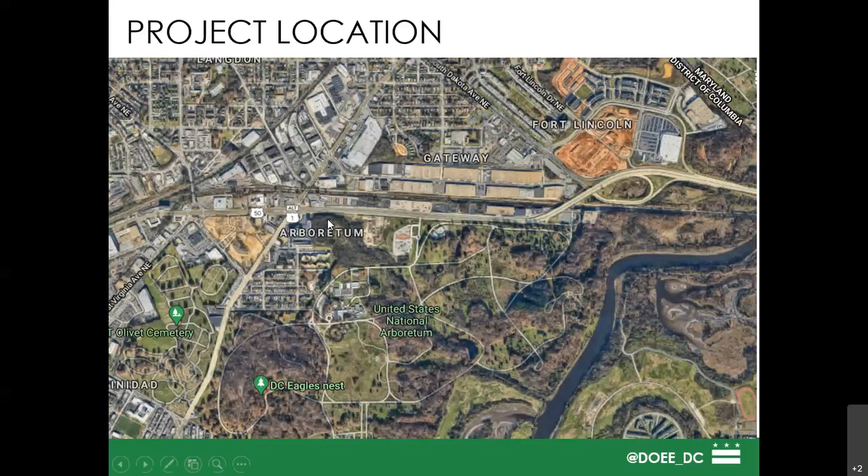So very briefly, our project location. When we say we're working at the Arboretum, we are working at the Arboretum. So we all know where that is, located off of Route 50. But if we drill down, the area in particular that we are working off of is along Hickey Lane Northeast, near where the R Street entrance is. There's a large parking lot that most people probably park at to go to the Arboretum Visitor Center, and that would be where we're focusing our efforts.

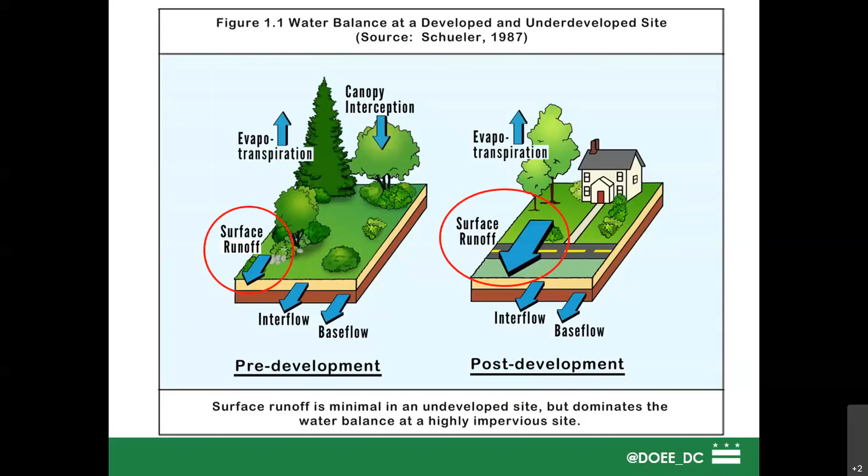So what? This is the so what factor. Why do we care? In the business, we like to say that the problem with stormwater is that it is hot, fast, and dirty. Hot, it contributes to thermal pollution when it's coming off of a hot parking lot. Anyone who's seen a parking lot in the summertime can actually see the heat coming off that parking lot. Well, when a rain event happens, stormwater will hit that parking lot and kick up all of that heat, and bring the heat with the stormwater into the streams and rivers. That thermal pollution is not good for our aquatic friends.

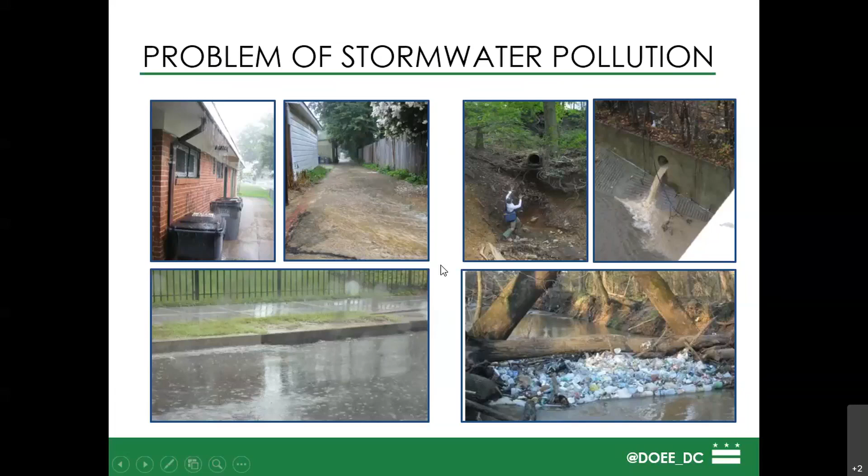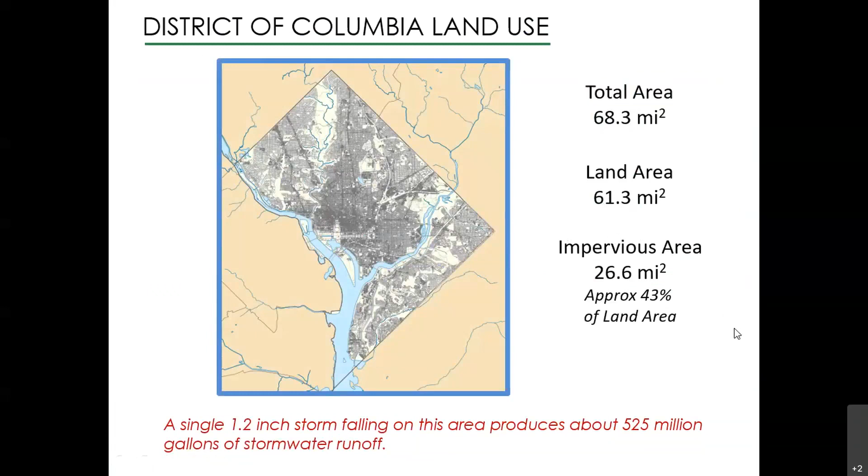So with that in mind, let's take a look at the land cover of the district. So in the district, we've got 68.3 square miles of area. Much of that is land, 61.3, where the rest is the streams and the rivers. And of that 61.3 square miles, approximately 43% is impervious cover. And what that means is a single 1.2-inch storm falling on this area will produce about 525 million gallons of stormwater runoff. And that's for one storm event.

We use the 1.2-inch storm as our metric because the majority of the storms in the district are 1.2 inches or less on an annual basis. So again, that's 525 million gallons for one storm event. So that's really the problem that we're trying to deal with.

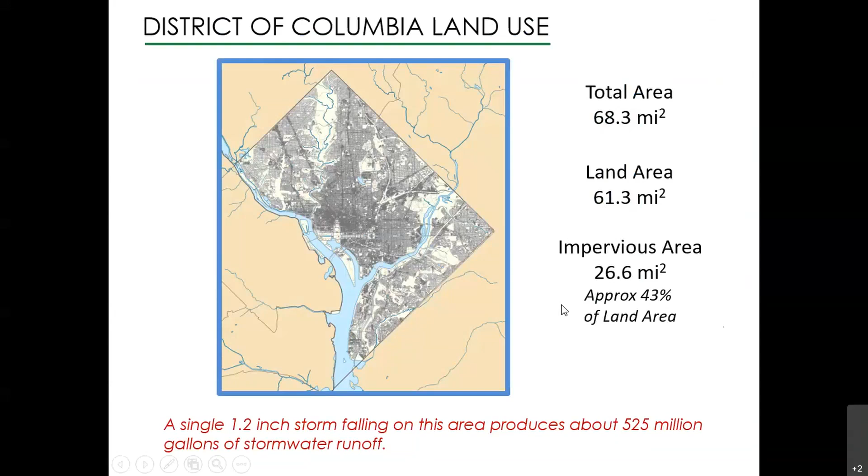The one thing that I like to do at this point is point out that there are actually two different sewer sheds within the district. The central part of the district is called the combined sewer shed, and that means that wastewater and stormwater are going to the same location. They're going to the wastewater treatment plant. That's where DC Water is focusing their efforts, and they're building large underground tunnels to capture the larger flow events. Because when there's a storm event, that water doesn't go to the wastewater treatment plant, but actually overflows with everything else into our streams and rivers.

However, the rest of the district, the other 2/3 of the district, is what we call an MS4 system, or a municipal separate storm sewer system. So there's 4 S's there. That's why it's called that. And that's where DOEE focuses our efforts, because that means the water that goes into the storm drain goes into a pipe and is delivered directly to our streams and rivers. There's no filtration. There's no wastewater treatment that's occurring. Anything that's hitting that storm drain is going straight into our rivers. And again, it's everything that it picks up along the way.

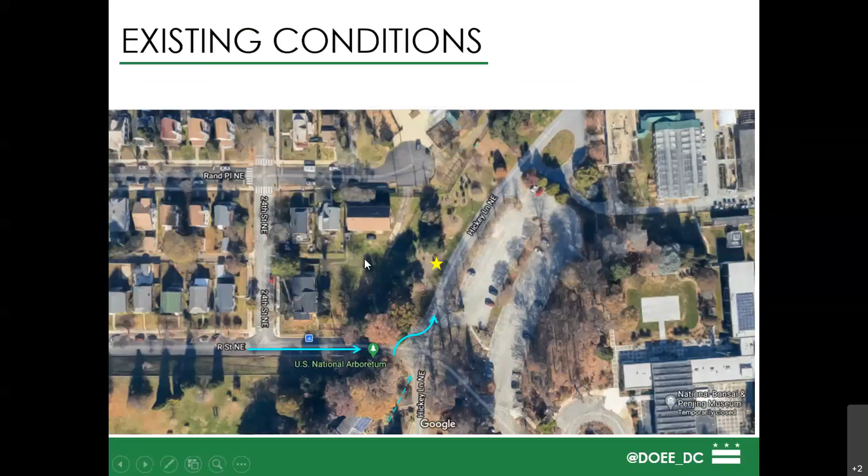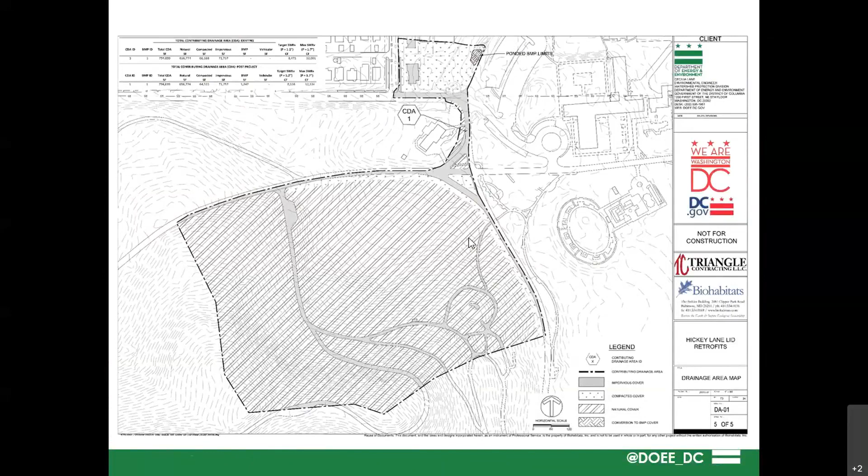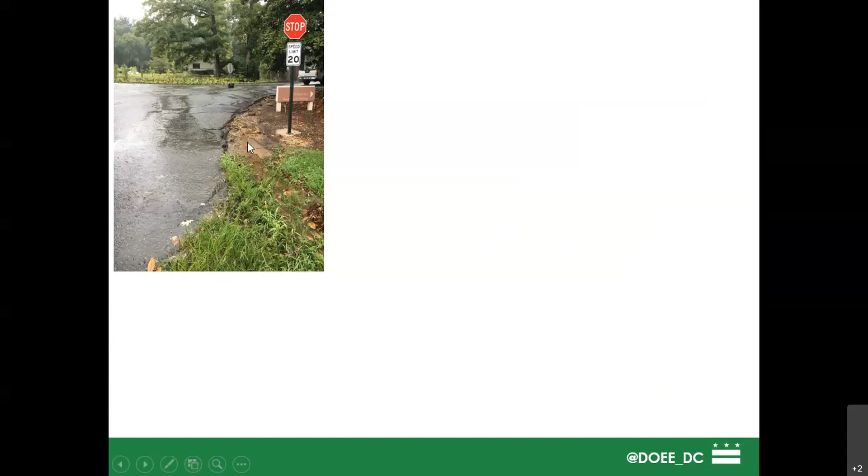You can also see from this photo how water is coming from that upland drainage area and kind of crossing this area and coming into the area that we are most focused on. Similarly, this is just another perspective of the same shot, kind of shows that during a larger storm event, how that water is really moving through there very quickly and creating erosion, undermining the asphalt.

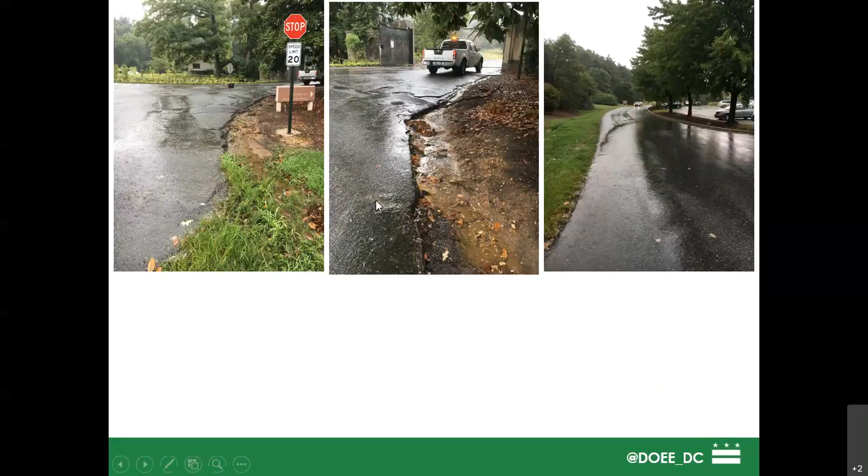And this just shows a little bit further downstream. The stop sign is up here by the R Street entrance. The area that we'll be working in is directly adjacent to that. And if we don't capture and manage some of the stormwater, it shows how it'll continue on down, ultimately into Hickey Run, but also floods the greenhouse for the Arboretum staff. So that's no fun.

Okay, so why did DOEE take on this project? Our goal is to treat as much stormwater on the site as possible. So, you know, when we bid this project, we were really looking at the stormwater from the public right-of-way or what's coming in from the R Street entrance, as well as whatever stormwater is being contributed by the Arboretum. But as I said, once we started to get into the investigative stage of this project, we found that the drainage area for this particular site was relatively significant because the Arboretum does have a lot of land area that drains to this location. That's a good thing for us because, again, we get more stormwater management, more treatment, although it does obviously impact our project.

We want to support previous stormwater management approaches that were used on the site. A few years back, Springhouse Run was restored, and as part of that project, a few demonstration bioretention or rain gardens were utilized within the parking lot. They were thrown in at the end for good measure, but again, we're dealing with such a large area and such a large amount of water that they're insufficient for managing that water.

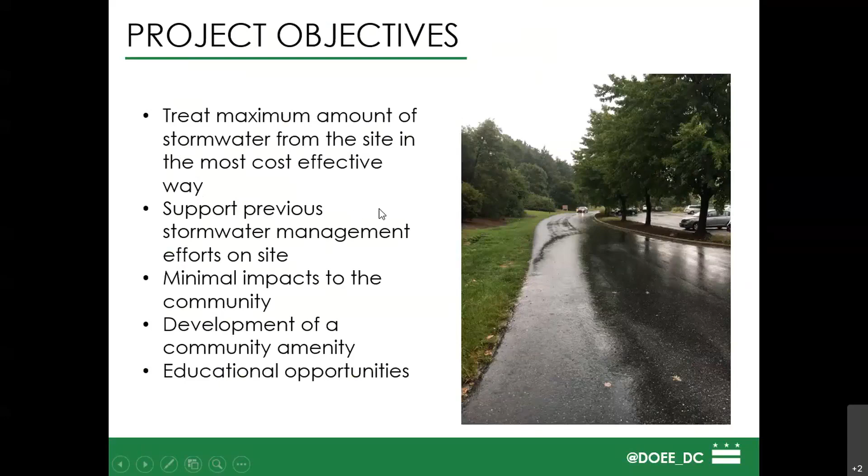We want to have minimal impacts on the community and the stakeholders for the site, as well as develop an amenity for the community and stakeholders of the site. And then finally, we're always looking for the opportunity to provide education about stormwater and restoration. All right, so now let's get into how do we restore these areas? What different techniques are utilized?

Most stormwater practices function in the same way. They're basically trying to mimic the natural processes that would happen prior to land development. So they're doing exactly what we saw in that earlier schematic where we had lots of vegetation and good soils and not a lot of hardscapes. We're going to have better infiltration, utilize evapotranspiration to reduce that stormwater that's running off of the land, and then infiltrating it and allowing it to slowly return to our streams and rivers. There's less of it and it's cleaner and it has less of an impact on our streams and rivers.

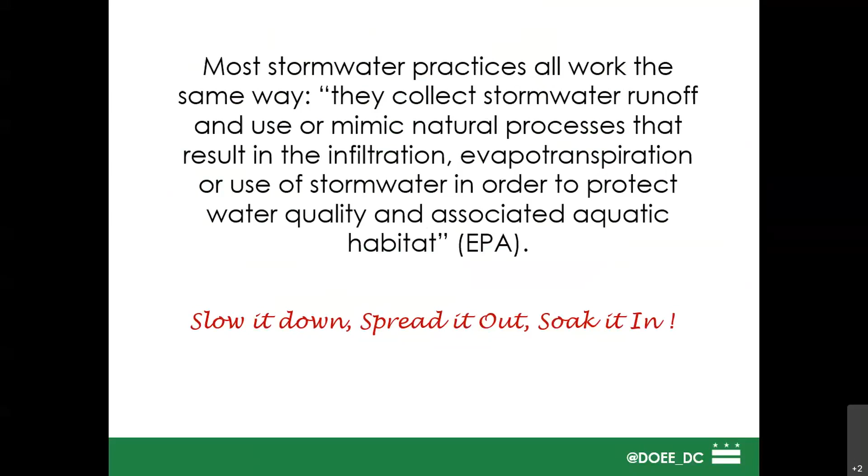So in the EPA, they like to say, slow it down, spread it out, and soak it in. And that's what we try to do in the district is slow it down, cool it off, clean it up through the use of low impact development or green infrastructure.

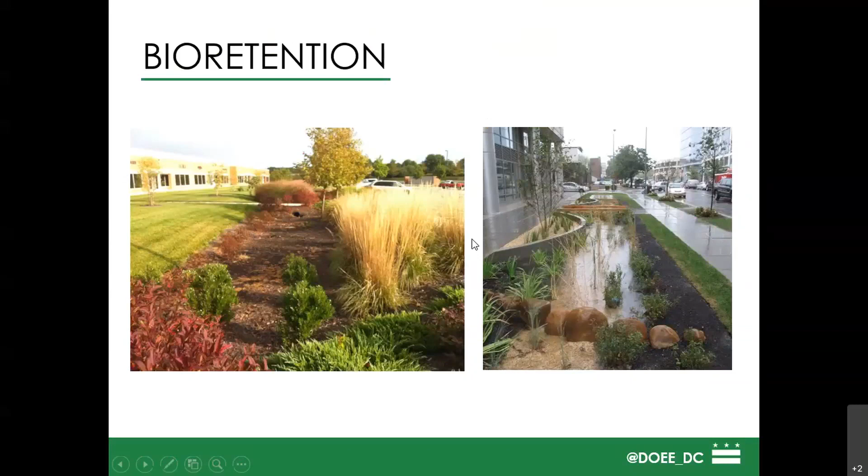All right, let's take a look at how bioretention works, since the majority of what we do in this business is utilize bioretention as a technique. So basically, it's a depressed area, first of all, that has been backfilled with an engineered filter media that's 85% sand so that it can drain really well.

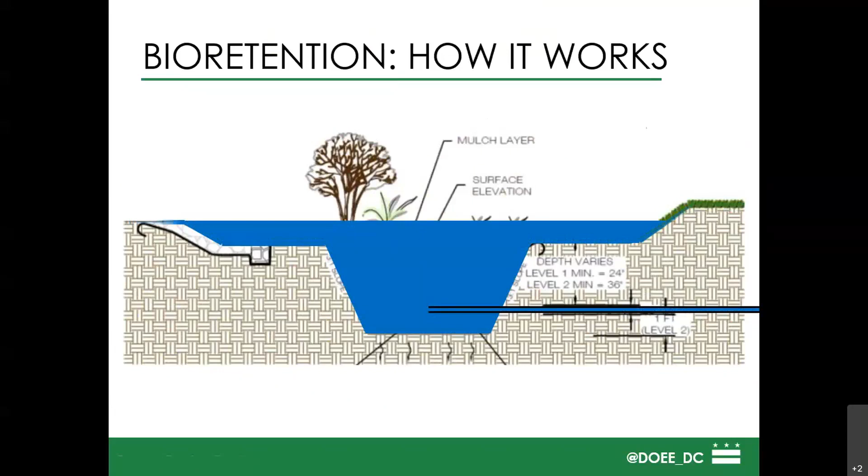Water flows in and then slowly ponds in that area and travels down through the engineered filter media. You see pretty quickly the ponded area will draw down, and then slowly over time, the water will make its way through the filter media.

And then depending on the design and depending on your existing soils, either you have great soils and you can infiltrate into the surrounding soils where, again, that water will return as subsurface flow to the streams and rivers.

Or if you don't have great soils, you'll have an underdrain, which we typically have to utilize in the District since a lot of our soils are infill redevelopment. And that underdrain is a perforated pipe that will collect the water and return the cleaner water back to the storm sewer system.

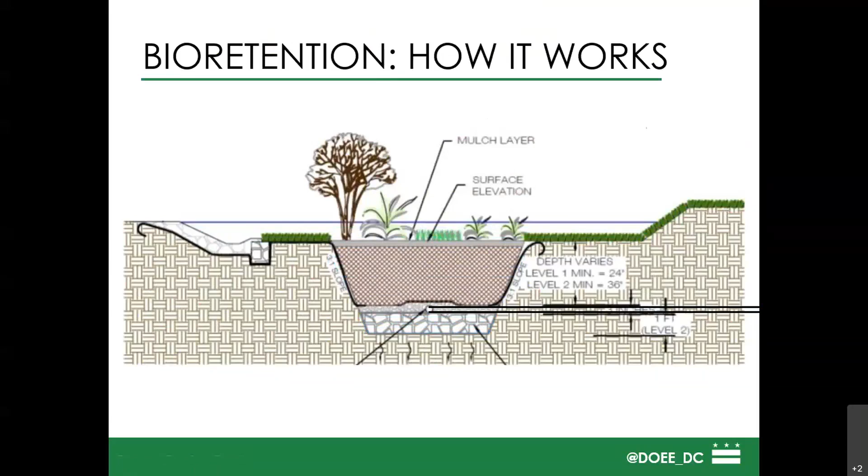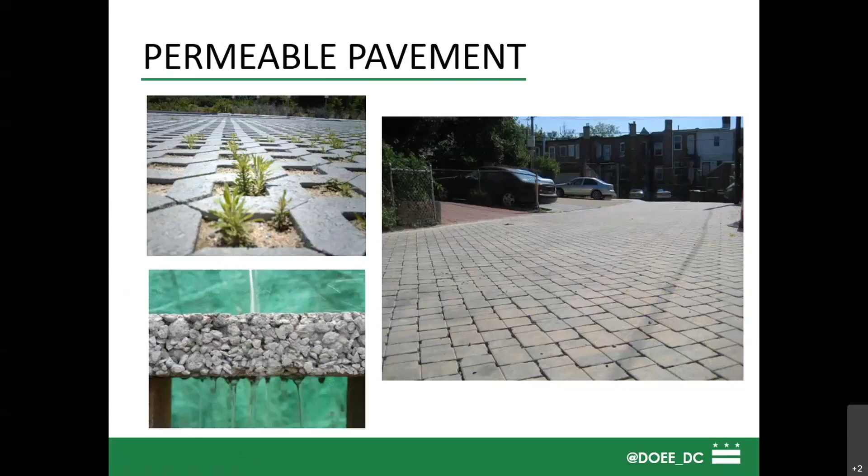And there's a good stone layer underneath that sort of acts to hold that water temporarily while it can be released slowly back into the subsurface flow. Again, we won't be utilizing that in this particular location, but it's good to be aware of.

The practice we will be utilizing in this particular location is something that we don't use very often in the District, but it's called the submerged gravel wetlands. Submerged gravel wetlands offer a pollutant reduction by using algae and bacteria that are growing in the filter media.

Basically, what this means is we have a pretty high water table in the area that we're trying to work in. With bioretention, you need to have a certain distance between where the water comes in and then where it goes out so that it actually does get that filtration benefit. With a high water table, we don't really have that opportunity. So we're utilizing a different technique called the submerged gravel wetlands.

We also heard from our partners at the Arboretum that this was an approach that appealed to them because it would allow for them to grow a different plant palette in this particular location. They would actually be utilizing wetland plants to provide those additional nutrient benefits.

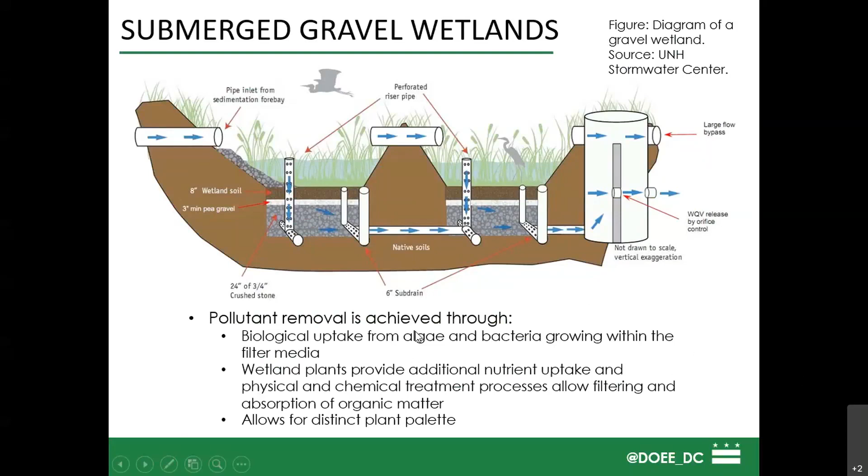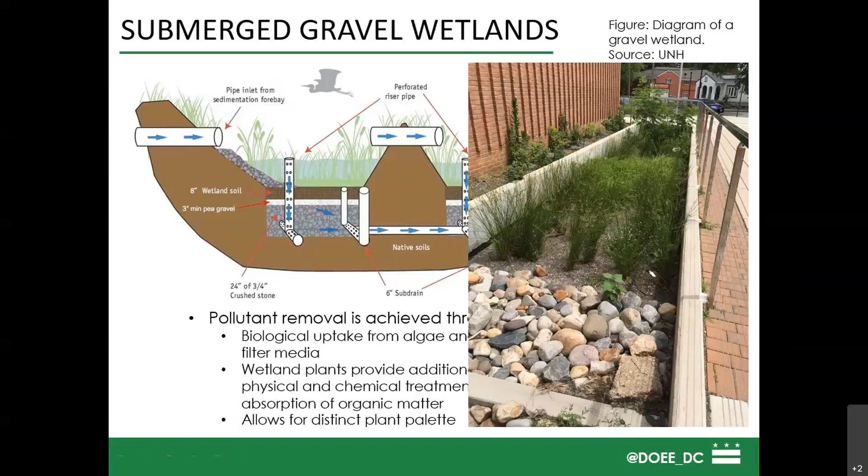This picture on the right is a photo of a submerged gravel wetland that has been installed. So what I just showed you previously is a schematic of how it functions, but this shows you what it would look like at the surface level.

Okay, so dealing with our project concept, just so everyone can orient themselves. This road right here, if you can see my mouse, is Hickey Lane Northeast. Coming in over here is our street, and you can kind of see where this curb was, or there's a lack of curb, and there was that erosion happening.

The concept is to install a submerged gravel wetland in this open area. We need to have the infrastructure that we can tie back into. So we've got a nice storm drain there, and that's part of it; in stormwater, we always want to make sure that we're working where the water is going.

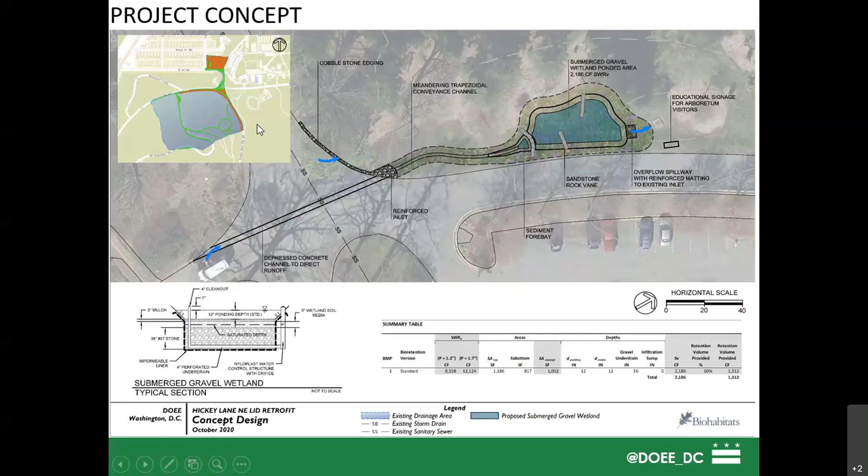We're not redirecting the water. We're not working against gravity whenever possible. Now, in this particular location, we will be putting in a depressed concrete channel, because remember, we're going to try to capture as much of that contributing drainage area as we can. And just as a reminder, up in the upper left corner, you can see that contributing drainage area. The area in orange is where we will be working, and this is where all of that water is coming from.

So for the project timeline, this project was contracted in March of this past year. Like I said, the first part is some of that investigative science. April through July, we spent a lot of time doing the field assessments, looking at how the land drains water, looking at those soils underneath ground. Do they have the ability to absorb additional water, or not so much as in this case? Then once we have that information, we can get into the design.

So between August and January of this upcoming year is design development. Basically what that looks like is we have 3 different iterations of design. We have our concept level designs, or 30%, and that's tonight's meeting. Semi-final designs are 65%, and so that'll be within the next couple months. And if you are interested, we will be updating the website and sending out notices via social media and to

the stakeholder list. And then ultimately, when we're fully designed and permitted, we'll have a construction kickoff meeting, where we'll be able to get into some of the more details of what time of day are we working, what days of the week are we working, what kind of trucks we'll expect to see on site, what sort of parking impacts would there be, and so on and so forth.

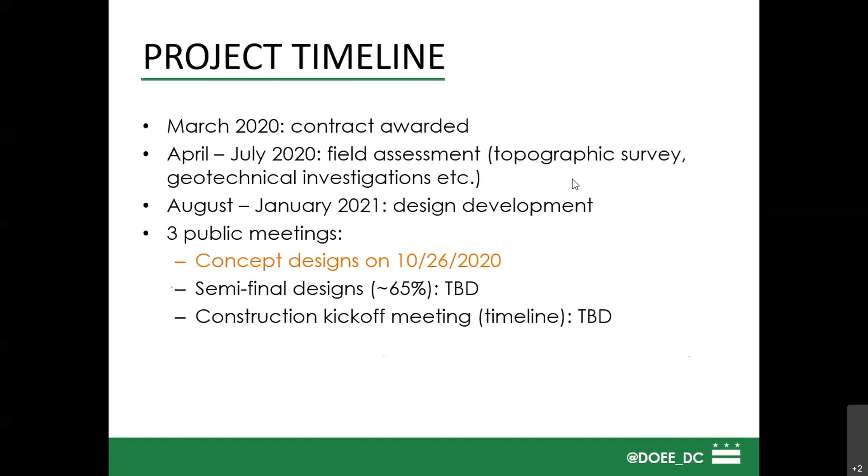So some frequently asked questions that I get in these public meetings are, number one, how do we find our sites? And the number one answer is enthusiastic landowners. At DOEE, we don't own any land. So we really need to work well with our partners. And oftentimes what we find is our partners come to us. They're wrestling with how to manage a lot of the stormwater from the site.

As I said, a lot of what we're doing is atoning for the sins of our past, when we did not understand the impact that land development had on our water resources and our aquatic friends. So when we have a landowner that is enthusiastic and willing to work with us, we go for it. So the Arboretum has been a good partner to us. We, like I said, did the Springhouse Run stream restoration project and some smaller low impact development retrofits of the parking lot. This is another opportunity for us to manage some stormwater and address some of the issues that they're experiencing.

Sometimes our funding sources for these projects dictate where we can or cannot work. Oftentimes, I find that I can either only work on federal land with my money, or I can absolutely not work on federal land with my money. So for the funding source for this particular project, obviously I can work on federal land, so that's very exciting.

Large areas of untreated impervious cover. As I mentioned, if we consider stormwater to be an issue of imperviousness, then when we find an area that's got a lot of impervious cover, like you see in the photo on the upper right-hand side of the screen, and has no stormwater management controls, probably because it was developed prior to the promulgation of our regulations, that's a great opportunity for us to come in and retrofit the site with stormwater management, and that will help the receiving rivers and streams.

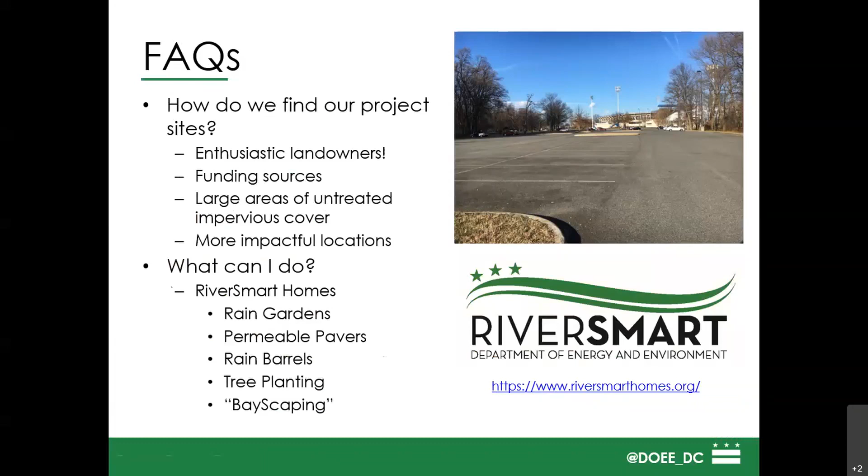And with that, that is the end of my presentation on the Hickey Lane Stormwater Retrofit project. I'm going to take a look at the chat box, but this is our Q&A opportunity. So if you have any questions, please go ahead and put them in the chat box, or let me know if you're having any issues and we might be able to figure out how to unmute you.